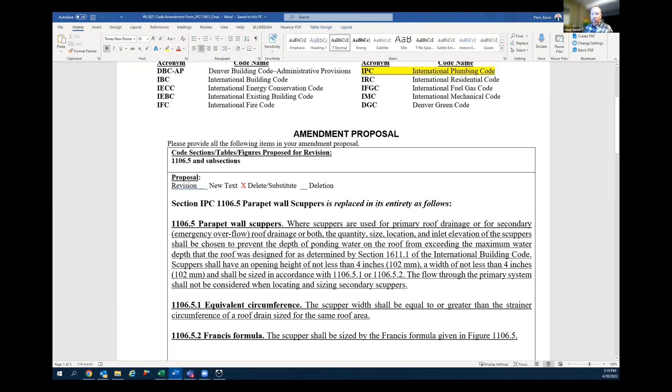Currently in the base code, they have the requirement for the scuppers to be sized by the equivalent circumference of a roof drain. Well, roof drains can be multiple different circumferences on their flat roof or flat roofs, etc. And it doesn't really define which part of the roof drain is required to be used for that calculation. So we reached out to the proponent multiple times in the last year, and it came back that the intended circumference was the strainer circumference. And if you actually use that circumference, it really oversizes the scupper compared to what has typically been used.

So we brought forward the Francis equation that's been in the IPC commentary for years and typically used by designers here in Denver for design on the scuppers. The intent is to clarify the circumference and then bring the Francis formula forward as an optional compliance path. That's pretty much it.

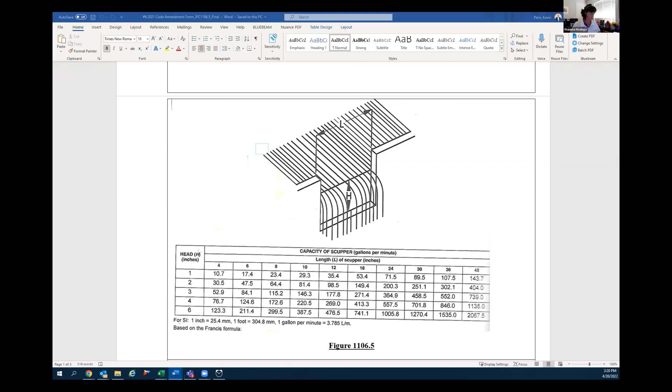Can I ask a question real quick, Chuck? Sure. When I look at 1106.5.2, for some reason I thought it was an option, but it's not worded as an option. How is it worded? Never mind, 1106.5, I remembered it was always going to be an option, but 1106.5 says in accordance with 5.1 or 5.2. I answered my own question. Sorry, thank you, all right.

Okay, committee members, hold tight, we're going to go to the general public. Anybody from the general public that wants to speak in support of this proposal, please raise your hand. Third and final call, anybody that wants to speak in support of this, please raise your hand.

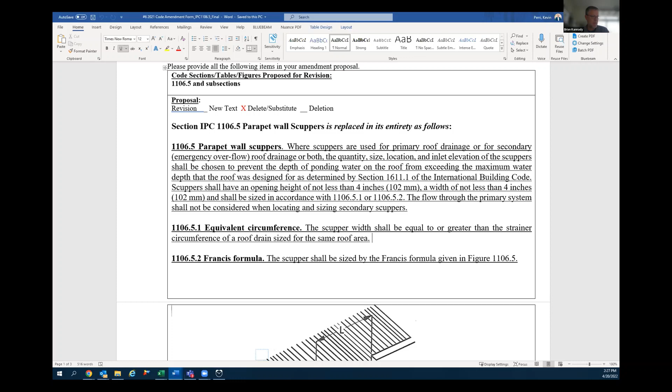Right, next question comes from Brian. I had a question on part 2, the Francis formula and the diagram and the table there. This comes from the commentary on the IPC, if I remember correctly, but I think there's a few missing pieces and parts to the diagram. Isn't there the actual Francis formula and some definition of what all the variables are?

You know, I don't have the commentary in front of me. You may be correct. So if we agree to approve this method, we could agree to approve this proposal, and we would verify that those definitions and formulas get added to the amendments to make sure there's nothing left out.

Any other questions from the committee? Being none, we will go to our next section. Being that there was nobody that wanted to speak in support or opposition from the general public, we will not go to any rebuttals from the general public.

So that means now we go into open discussion with the committee members. Committee members, this is your time to have any further discussion. If you didn't get to ask your question before, you can ask it now. Or you can make a motion. If anybody's ready to make a motion, we can do that. Matt, go ahead.

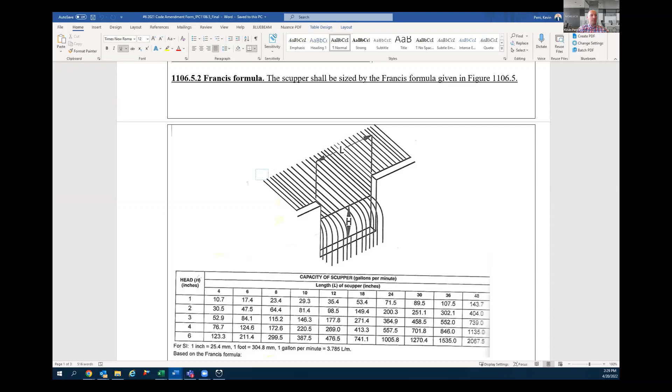So when researching this, I noticed that in the past, the code has been amended to follow the 2012 version for sizing of roof drains, which relies on roof area to determine the size of lines that serve roof drains. This is a bit unrelated, but it's tangential to how this Francis formula may be used. In the base amendments, I think the rainfall per hour was reduced to 2.4 as opposed to 3. Does this sound familiar to others? Yeah, correct.

So I'm wondering about that relative to this. I'm trying to make sure that this is clear to still use. So are we going to be using that 2.4 number to then develop a gallons per minute flow rate to the scupper and simply follow through with the Francis formula? If we do so, I think it would be wise to have in here the complete formula so that if someone needed to illustrate something that's not part of the table value, they could do so.

Yeah, no, I agree. I think we should add the supporting equation into this amendment. Make sure it's included in the proposal.

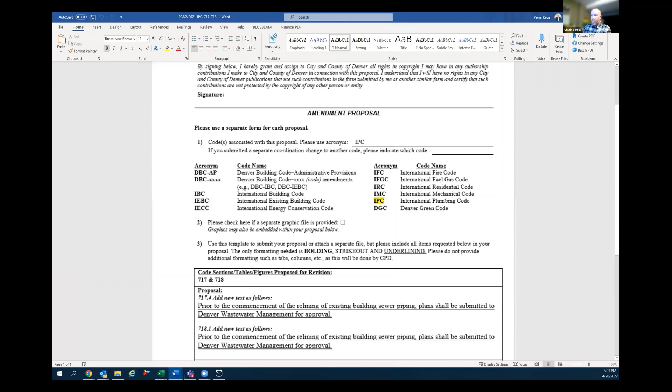The 2021 IPC now has 2 new sections. It talks about relining existing building sewer piping, and then also cast in place relining of sewer piping. So I reached out to our partners in wastewater, and they don't always allow this to take place as a means of remediation. So the intent of this is just to add the sentence directing the constituent that they must get Denver wastewater approval before proceeding forward, to make sure that permit and that approval is obtained.

Okay, thanks for the summary. I'll go to the general public first. Anybody that wants to speak in support of this, please raise your hand. Second call, anybody from the general public that wants to speak in support, please raise your hand. Third and final call, anybody that wants to speak in support, please raise your hand. Seeing none, I'll go to opposition. Anybody that wants to speak in opposition, please raise your hand. Second call. Third and final call, anybody from the general public that wants to speak in opposition, please raise your hand. Seeing none, I'll go back to the committee.

Committee, this is your time to ask questions and questions only. Anybody from the committee have questions? Seeing none, I will ask anybody who wants to have any discussion from the committee. This is now your opportunity to have discussion or make a motion.

Michael, you're up first. Yeah, just a quick question - are they basically required to pull a permit? Is that the intent, Chuck? They would be required to - depends if it's inside the building, they would be required to pull a plumbing permit, and then the exterior or the building sewer piping outside the building is SUDP, so they would require a wastewater permit.

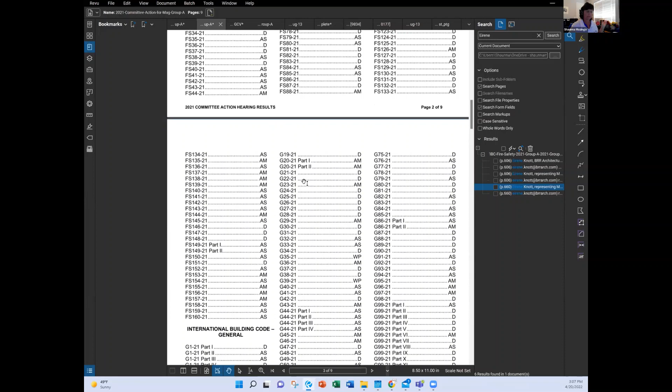What I want to show you though is the residential code. So their residential code is proposing to remove the reference to the 22.2. The 2024, this is what was approved for the 2024 by these same proponents. And so I would just say what they're proposing right now to go into year 2021 removes that reference to the 2022 or the 22.2.

And I would just ask if, because this is what was approved for the 2024, if we might mirror this and bring back that 22.2 so that we don't have to turn around and change it again in 2024. I talked to the proponents ahead of time. They said that they were okay matching what's in the 2024 instead of the 2021. And so this is what got approved. And I just wanted to point that out.

And that way, when the proponents have a chance to testify, maybe they could address this issue. Like I say, the mechanical code reference that they're proposing is exactly what's going to be in the 24, but the residential mechanical isn't. So just want to ask them to please address that in their comments. And I will quit sharing my screen. Maybe, there you go. Okay, thank you Shauna.

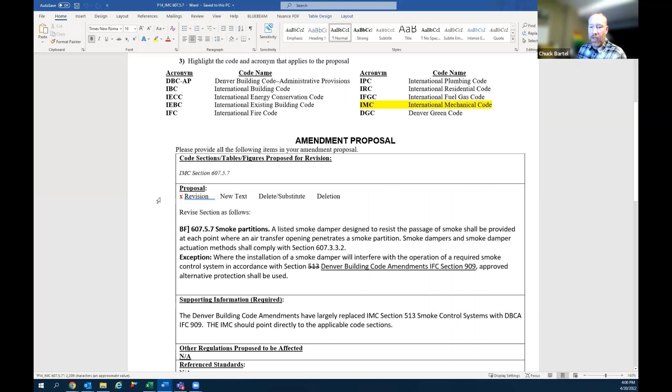Okay, so this proposal is mainly just a cleanup. The base code references section 513 for smoke control, and in Denver we pretty much eliminated most of 513 through amendments and reference 909 of the fire code. So this is just correcting a pointer in code, essentially.

Can I point out it's just something we need to fix in printing. Right now, under the exception, they're adding the underlined Denver Building Code amendments, IFC section 909. Right before that, it says 'in accordance with section' - that word section should be deleted as well, right? Yeah, so that's my only comment on this proposal.

Thank you. Okay, great. So I'll go to the general public. Anybody from the general public that wants to speak in support of this, please raise your hand. Third and final call, anybody from the general public that wants to speak in support, please raise your hand.

Seeing none, I'll go to opposition. Anybody from the general public that wants to speak in opposition, please raise your hand. Third and final call, anybody that wants to speak in opposition? Seeing none, I'll go back to the committee. Committee, this is your time for questions.

Any questions from the committee? Third call for questions. Seeing none, we'll go to discussion. Committee, this is your time to discuss and or make a motion. Anybody want to make a motion?

Matt, your hand's up first. I guess I just wanted to ask, so 513 has to be coordinated with 909. It's not struck, isn't that correct?

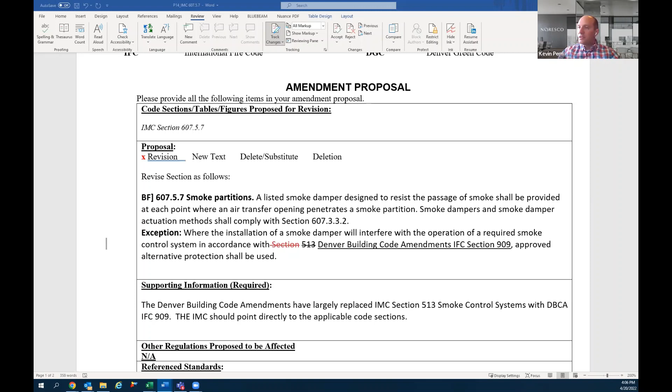Okay, next item of business. Let me close this out. And we voted earlier that we're going to hear P15.1 and item number 1 together. So what we'll do is I will introduce 15.1, let Anna give us a summary on that. And then I will go through the public comments, and then I'll open up item number 1, let Chuck give us a summary and go through that.

I'm sorry, maybe I confused it. My thing was they don't have to be heard together - this is like, and then voted on. I just didn't want there to be an item in between them. So heard next, just move item number 1 up after 15.1, or move P25 after number 1, so that we could hear anything ventilation right next to each other. I don't know that they have to be heard together.

Great, okay, so then we'll just move on to 15.1. Anna, let's unmute you. And please introduce yourself, and while I pull up your proposal, just give us a summary on that. Sure, can you guys hear me? Yes, okay. Yes, my name is Anna McCullough, I am a building performance engineer with Group 14 Engineering.

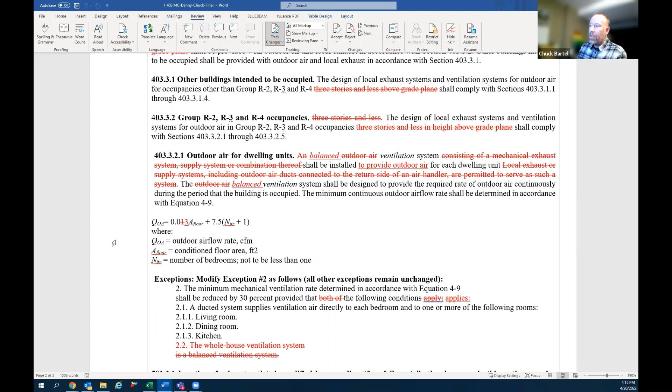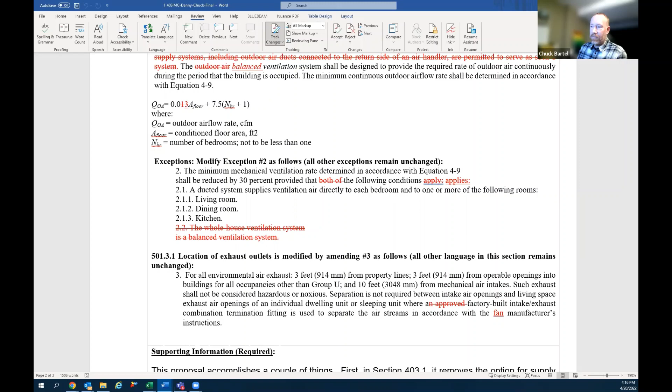And then finally, in Chapter 5, there's similar language as what's required in the intake requirements, that if you have a manufactured device, you can have for residential units, you can have a less clearance, the intake and exhaust. And that's also intended to help with energy recovery units, the use of energy recovery units. So that's a quick summary of this needed amendment.

Okay, thanks, Chuck. We have our subject matter expert, Shauna, that wants to bring something up. Yeah, so I worked pretty extensively with the proponents on this, and we did a lot of research of what was going on at the national level and into the 2024.

First, I would bring up when it comes to the 3 stories or less or 4 stories or more, that really for Denver really only applies to your R3s and R4s, because Denver has amendments in their energy code that make R2s a commercial building anyway. So it didn't matter if they were 3 stories or less or 4 stories or more, they all had to comply with the commercial requirements. So it really is only a bigger change for the R3s and R4s. And that's just saying that now they all have to get mechanical ventilation, which if they were built under the IRC, those are, instead of being an R3, if it was built under the IRC, it'd have to get mechanical ventilation. So it's not a huge change.

But I would say that also this change in the rate from the 0.01 to the 0.03, that got changed at 2024. And I'll be honest, I fought against it, but I lost. And so this is what's going to be in the 2024. This is the way it's moving. Having it apply mechanical ventilation, balanced ventilation, and at this different rate is what you're going to see in the 2024. And so I would just offer that up to you.

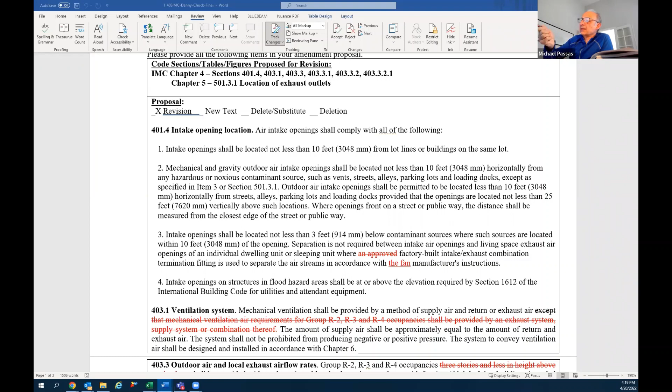Yeah, I do have a question with the word balance. Does that imply that if you're putting 50 CFM into the space, you have to exhaust 50 CFM? That's my first question. And then the second is, there's a bunch of other amendments on the 19 code. How are those going to get modified? So anyway, I just got 2 questions basically.

I don't know if you want to answer that, Chuck, or you want me to answer that? No, I mean, I think the idea is that it should be, there can be some pressure differential, and that's allowed in the other sections of the code. But the intent was to require supply, that there will be exhaust in the unit through the kitchen exhaust and the restroom exhaust. And so the intent is really for the supply to be provided. And there can be slight pressure differentials associated with a little bit of imbalance, but the exhaust only systems that pull ventilation or pull air from who knows where. I mean, we hope it's from the outside, but it could be from your neighbor, or from the hallway, or wherever. The intent is to require the supply.

And the existing amendments will be modified to support this one. So like 401.4 will go away. And we'll use the base code 401.4.

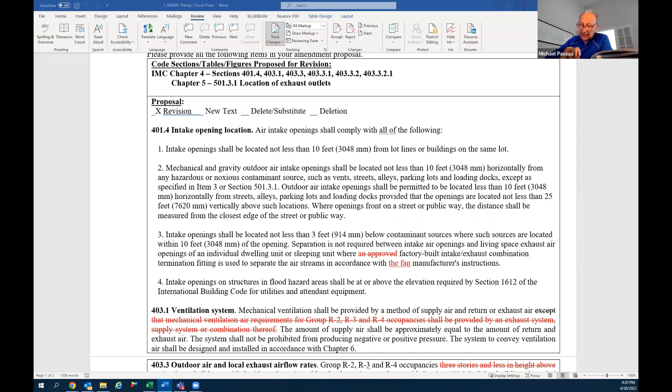So when we had exhaust only, I understood the reason to have the word balanced, but if we have supply, I'm not quite sure the purpose of that word anymore.

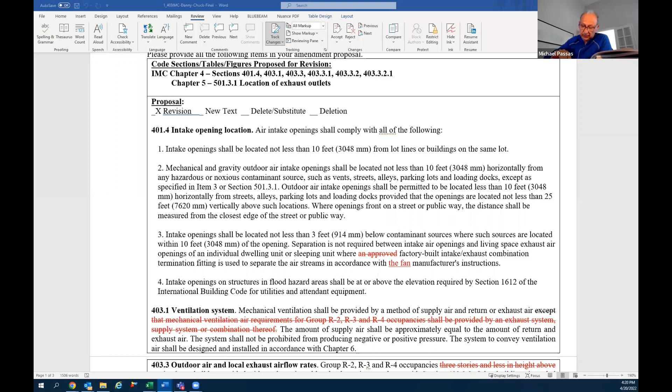If you're looking in the code, the energy code and the mechanical code discuss balanced ventilation as being somewhat equal amount of air going out as air coming in. So what they're trying to say is you can no longer just do an exhaust only or a supply only. You need to balance that out and have roughly the same. It does give you some leniency in whether you can go a little bit negative, but it's not going to allow you to do a supply only or an exhaust only. You're going to have to do a balanced system. That doesn't mean you have to throw in an ERV or an HRV. There are many options of how to do a balanced system. But it's just not going to let you exhaust a bunch of air and not bring in some to replace it and hope that it comes back in through the openings in the envelope. That's basically what was happening.

Because the building is getting tighter and tighter, you don't want to rely on those little openings, right? I understood the exhaust part, but once you supply, there's a definition on that. Well, supply is the same, just opposite, right? So if I have a really tight building and I'm supplying a lot of air, I don't want to force the air out, I want to control how much air goes out. My definition of balance is 50 in, 50 out, not 50 in 40 out, or 40 out 30 in. Well, and balanced ventilation is actually a defined term in the IMC now. It's any combination of concurrently operating mechanical exhaust and mechanical supply, where the total mechanical exhaust airflow rate is within 10% of the total mechanical supply flow rate. So it's a defined term.

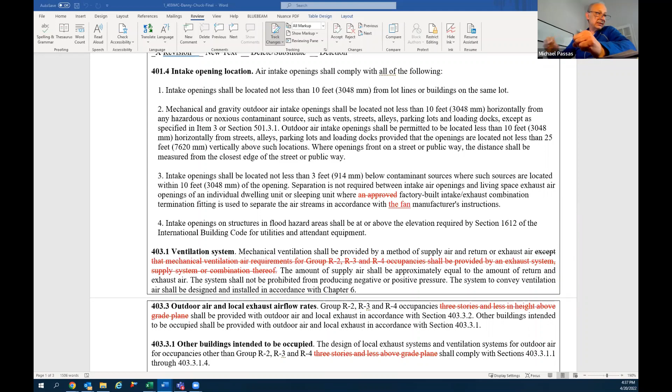Okay, thank you, Michael. Next hand up is Matt.

Yeah, so I wanted to return to what the base code says, because the base code talks about outdoor air for dwelling units. It does not use the word balanced. It talks about a system consisting of mechanical exhaust, supply, or combination thereof.

I think the apprehension with that is the exhaust side. We don't want this to simply be exhaust only. We want to provide a supply system to balance all of these exhaust fans that are otherwise required by the code. We're going to have to put kitchen exhaust in.

We have to exhaust the toilet rooms. We have to exhaust all these spaces we were just talking about that are so troublesome because we put them on switches, and then the amount of exhaust leaving the unit changes all the time. When you read just the base code, it doesn't put us in the bind that we're in right now with that word.

And it does include the verbiage of using mechanical exhaust, which I think it would be fair to say, with the history of using exhaust-only systems in Denver, designers are looking at that and saying, okay, well, this says I can still use exhaust. That's not what we want here. I think that's my take on the intent.

We don't want that. We want to have a supply system in place, knowing that we have all these exhaust flows that are going to happen anyway. So what I wanted to bring up here is the possibility of using the base code with less change to it. Essentially use the base code language, but simply remove the exhaust system option.

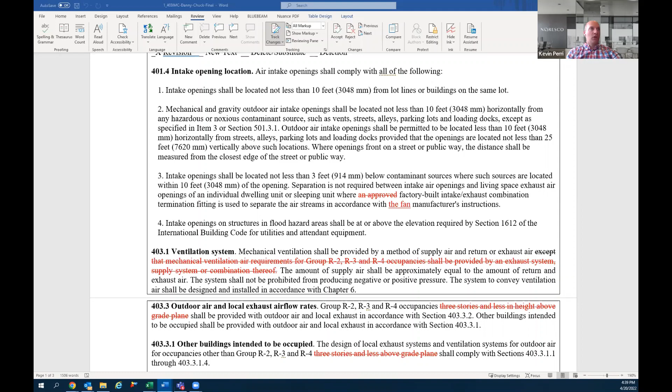Yeah, I just wanted to say that I agree with Mark, Michael, Matt. I agree. And Danny, the intent was not to require a balanced system that's able to modulate with exhaust fans turning on and off. The intent is to require a supply.

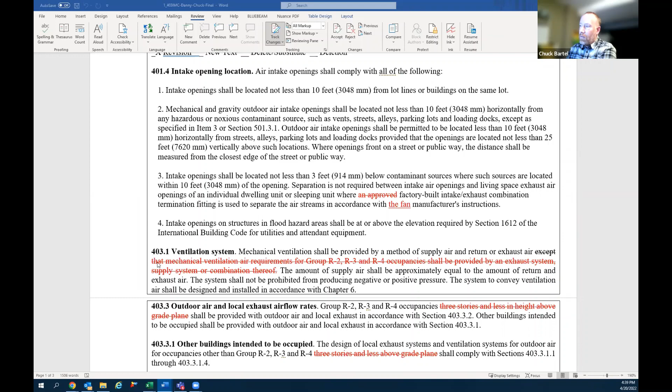So speaking to Matt's recommendation of just dropping the exhaust system, I think we can pretty much leave all the edits shown, but then in 403.3.2.1, drop the balanced system, every reference to balance in that section, and just leave the outdoor air that's in the base code.

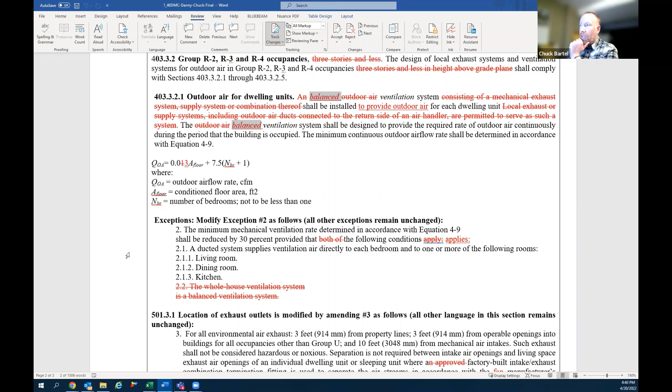And we get to what the intent is, because the intent really isn't to over design this and make it impossible to comply with in the city of Denver with units. The one challenge I have is, so in 403.1, the ventilation system in the base code, it says the amount of supply air shall be approximately equal to the amount of return and exhaust air.

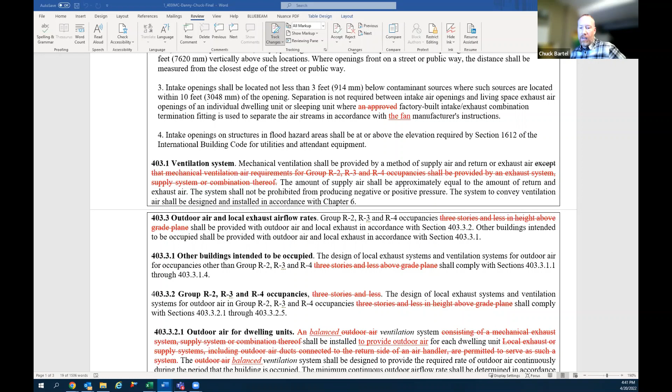That's in the base code, and it sort of hints at a balanced system, but doesn't prescribe per the definition of a balanced system. And that would be enforced with reason, and I think designed to with reason, but it's not to the strict definition of a balanced system. So it's sort of there in code moving forward. But yeah, I'm interested to hear what Danny has to say.

Right. Well, actually, could I comment on that just briefly, Chuck? The section that you're talking about, I think, is 403.1, where it talks about the amount of supply air being approximately equal to the amount of return or exhaust air. Where I think this gets, for dwelling units specifically, there's another subcode section, I think, that...

And that's the one that I just put into the chat to kind of dispel that a little bit, to say here for dwelling units, the intent is to provide mechanical supply. Other ventilation systems where you don't know if you're going to have those exhaust flows, then you do need to focus on making sure it is balanced. Does that make sense? They're kind of two different things; that other section of the code is talking about a wider group of applications.

Yeah, no, and that's what I mentioned, that I think in 403.3.2.1, we should drop balanced from there. Yep, so I'm reading yours now. Okay, yeah, I'm sorry to speak out of turn. Oh, no, it's meant to be a conversation.

Okay, so let's get Danny. I know, Danny, your hand's been going up and down. Danny, do you want to say something? You're on mute if you do. Danny, you're still on mute. There you are. So every time I raise my hand, somebody speaks and answers exactly what I was going to say. So that's why I keep raising and lowering my hand.

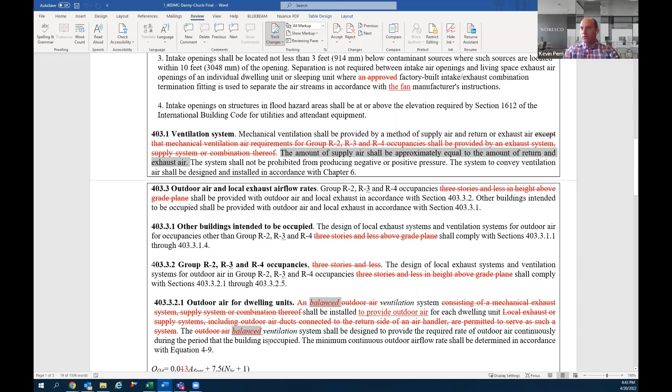Michael, go ahead. Yeah, I'll make a motion to approve with modifying and removing the word balance. Okay, let me get those going here. So removing these two in item 403.3.2.1, deleting the two words balanced.

Okay, is there a second on that? I second that. Okay, thanks, Danny. Any other discussion? Any other modifications? Chuck, go ahead.

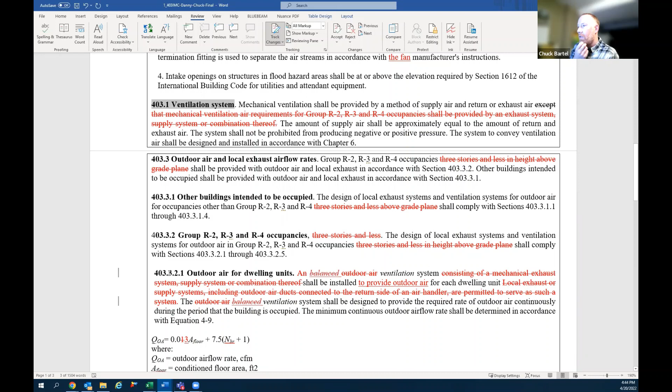No, section 403.1. Actually, I was looking at 403.3.2.1, just removing the word balanced. If that's it, then just leaving it as the ventilation system. I think that covers it.

Okay, Matt, you're up next. Well, I guess I was just going to, I know we have a motion and a second here, but the section that I put into the chat was intended to be sort of a lesser modification to the code as opposed to a rewrite. So, I suppose if the group agrees that simply removing the word balanced says the same thing, and that meets what we're trying to say, then that would make sense to me. My thought was to try to maintain fidelity to the base code, but.

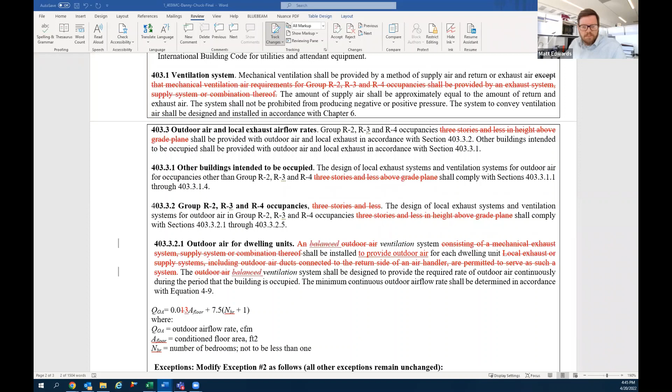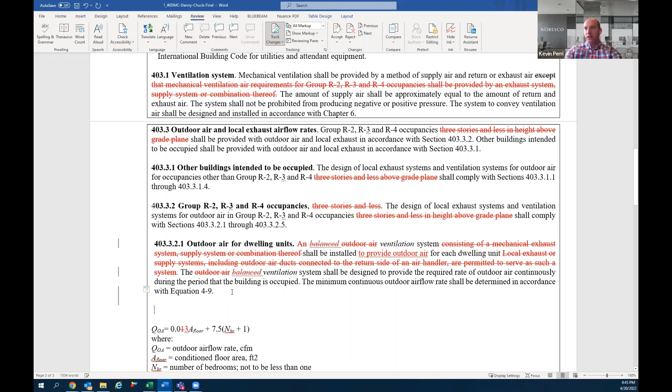Okay, so we have a motion and a second from Michael and Danny. Let me put that on the screen just so everybody can see. Again, this isn't a motion, but just so you all can compare side by side what Matt was wanting, or potentially wanted to put in there versus this. Go ahead and read that over, and if anybody wants to comment. Chuck, I see your hand still up. I don't know if you had a further comment or not.

Nope, okay, so I'll give you an opportunity to read that over. Brian's hand's up. Brian, go ahead. So, am I correct? The base code says an outdoor air ventilation system, and we would be striking the outdoor air portion of the code. Is that correct? Matt, was that your intent on this when you were writing it?

No, let me go back to that section. Oh, I see what you're saying, Brian, and I think it does make more sense to strike the balanced and add the outdoor air that is struck in the proposed language. But, right, yeah, the base code language says an outdoor air ventilation system consisting of a blah, blah, blah. So Matt, your intent on this specific one that you put in the chat was to keep the outdoor air as part of it? Correct, in alignment with the base code.

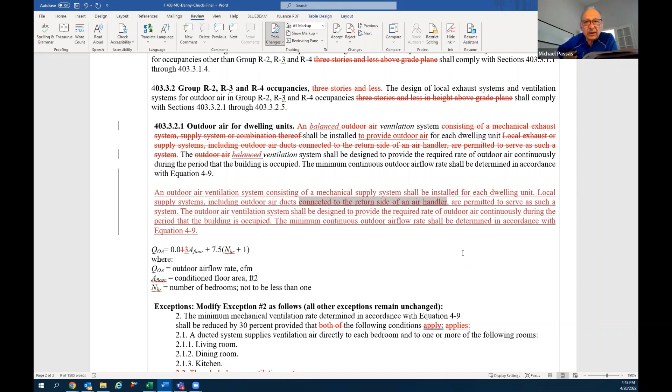So it doesn't necessarily need to go to the return side of the air handling unit. Yeah, and Michael, I think my read of that is that's one of the options, you can have it go direct to the space, or you can have it go direct to the return side of the air handler. I guess I read that as you could do either, and it would be in compliance. If it's not in the base code, I don't know that we need to give it a specific. We just need to deliver it to the space, because after that, there's another section where you can deliver to each room too.

Right, yeah, and that sentence where it says local supply systems, including outdoor air ducts connected to the return side of an air handler, are permitted to serve as such a system, that is in the base code. So it's essentially saying that if you were to take your residential fan coil and duct it to the outside, that would suffice. You don't have to use a duct from an ERV or some other system or another fan system that's direct to the space.

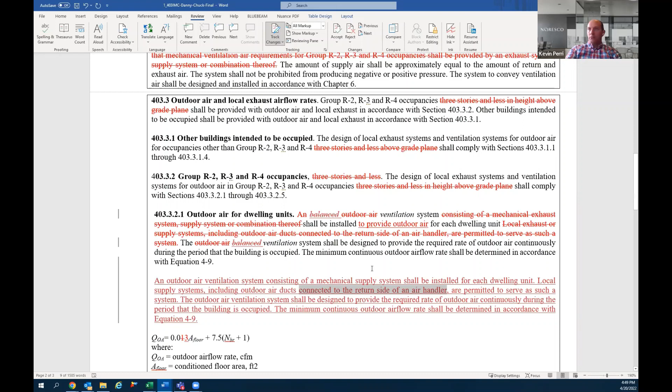Okay, so you all had an opportunity now to read what Matt was trying to get across. However, there is a motion with a second for this section that's highlighted instead. So unless Michael or I believe it was Danny that made the motion and second wanted to withdraw their motion, that would be the motion we would vote on. Yeah, I'll withdraw the motion and let somebody else.

I second that. Okay, alright, so let me, we would do this. Well, I guess since it was withdrawn, we need another motion for somebody to add this content into 403.3.2.1. So I move to modify 403.3.2.1 to include what's on screen now. Is there a second? Mark, I see your hand raised. Second. Okay, so I'll delete that. Any other discussion on that?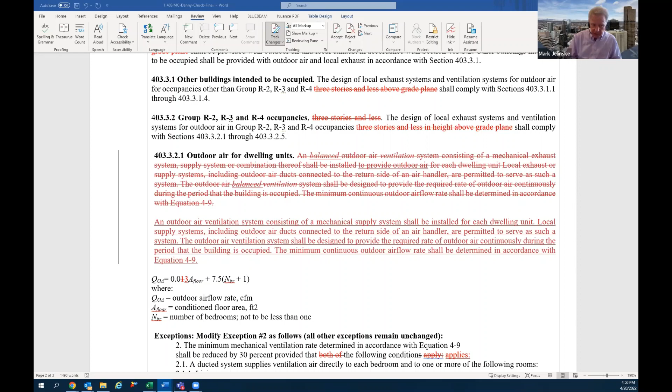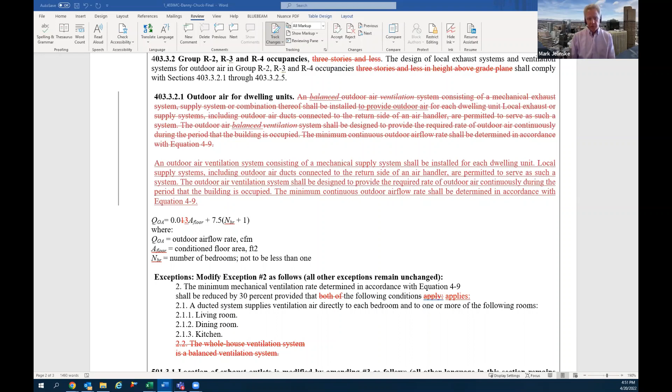I'm okay with that because we've also said we're trying not to get it too complicated. I think due to the IECC requirements for energy recovery units, you're going to have to come up with at least a baseline amount of exhaust at all times, so you have something to pull heat out of. I think the end result is that if you have a 75 CFM exhaust outside air requirement, most people will end up putting in a 75 CFM constant exhaust through that ERV.

So, other designers, what are you seeing there? What will you do? Yeah, and I think you hit it, Mark. When you have an ERV in a situation like this, you're going to be pushed away from intermittent fan operation. You're going to need a base amount that doesn't fluctuate much, because the ERV doesn't like imbalanced airflows. We have to make sure those flows match up to one another.

So it's probably not going to be 75 CFM you'd put into that dwelling unit. You may have to put in 200 or something in order to balance the flows coming back out. That's good, I definitely agree with that.

And then in smaller situations, let's take the 2-story residential building. Part of my concern was inadvertently adding cost to projects, like smaller buildings that aren't intended to carry the cost of an ERV, or buildings where there's just not ERVs made that small. There's that issue as well.

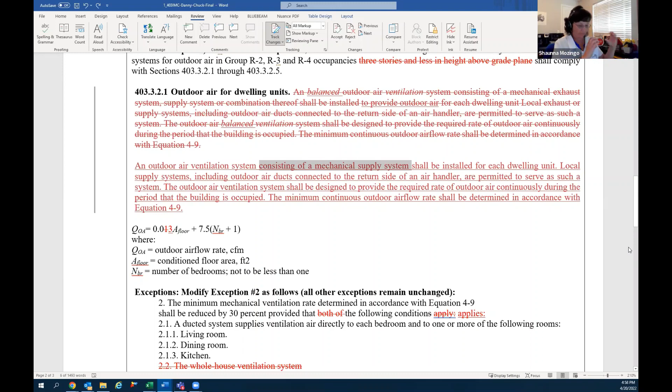Outdoor air ventilation system shall be installed for each dwelling unit. Yeah, that would make sense. Sorry, we jumped out of turn there. The main reason is because if you're in 403.1, the very first sentence says mechanical ventilation shall be provided by a method of supply air and return or exhaust air. So it's already going to require both, not one or the other, because you struck out the exception.

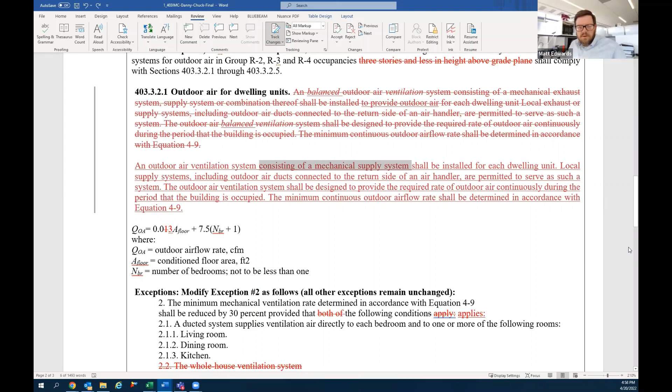Okay, so Matt and Mark, since this is your motion and second, are you okay with deleting that highlighted portion of it? Yes. Yes. Okay, great. And then Michael, your hand's up next.

I was going to say that I think there's an amendment that the air needs to be heated, and that can get a little bit... I think it was in the last code cycle that you cannot introduce raw air. I believe there's also an amendment that we cannot introduce raw air to the space, it needs to be heated. So we just need to take a look on that as well.

Any other comments at this time? We do have a motion on the table with a second, so we're in our discussion period here. The motion is to approve as amended, and the amended section is highlighted here.

Any other further discussion before I call a vote? In pretty good shape, I saw where you had counted down your unit sizes. I'll ask one more time, any other further discussion on this? I feel really good about this. Okay, seeing none, I will call a vote.

All those in favor of approving as amended on the screen, please raise your hand, as well as in all the meeting rooms on level 2. All right, I have 7, so that's unanimous.

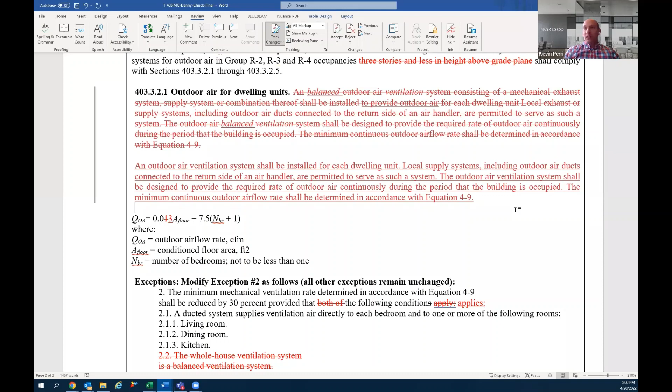Okay, thanks for that, lower your hands. We are right at 5, that never happens that we end exactly at 5. Sometimes it's before, sometimes it's after. So look at that, I think it was meant to be. Well, that's the end of the hearing for today. We did get through quite a few today, we have some left over, but we do have one more code hearing left, that's May the 4th.